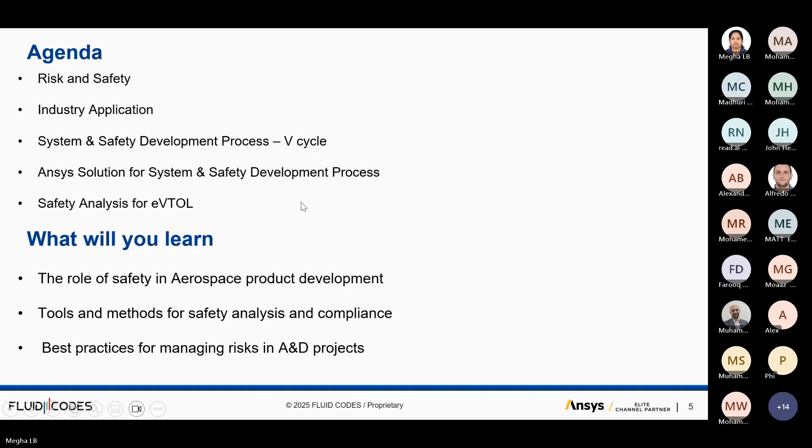Let's first understand the conceptualization and requirement definition. So in the requirements, it's nothing but the vehicle, what functionalities it's going to perform, especially with the requirements, what you are building the component for, what's its end use. The requirement detailed analysis is focused in the requirements, followed by we have design and prototyping.

So in the design and prototyping, for the functionalities and requirements that you have defined, you will be designing a system, subsystems, and components. If it's the OEM, it will be defining a system, what it is going to perform, followed by its subsystems, what subsystems it will be having. For example, it can be hydraulic, mechanical, electrical systems.

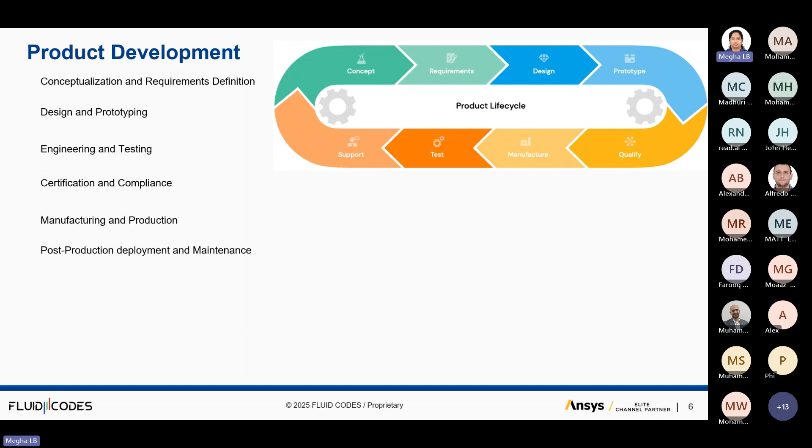Then we go for manufacturing and production, followed by post-production deployment and maintenance. So this is the process.

Let's now focus on the industry specific challenges that aerospace and defense companies are facing at the moment. Initially there's the high cost, because it is a research and development investment, followed by long development cycles.

So why does this happen initially? Because either there are no clearly defined requirements, or no clearly defined functionalities, or at the design stage the design or architecture provided is not very detailed. This is also why development cycles are long, because it's always done in a series manner: you have the requirements, then functionalities, then design, then you go for prototyping.

So is there a solution where you can work in parallel, where a requirement is given to multiple teams and they all work together? This would shortcut your long development cycles into smaller ones.

Next, what is the next challenge the industry is facing right now? Regulatory challenges. That comes into picture when the deployment of your system is going to be in different regions of the world. So to have it qualified with respect to the certifying authorities, you have to go through the certification process. For this, you have to define a process with respect to the industry standards defined by these agencies or companies.

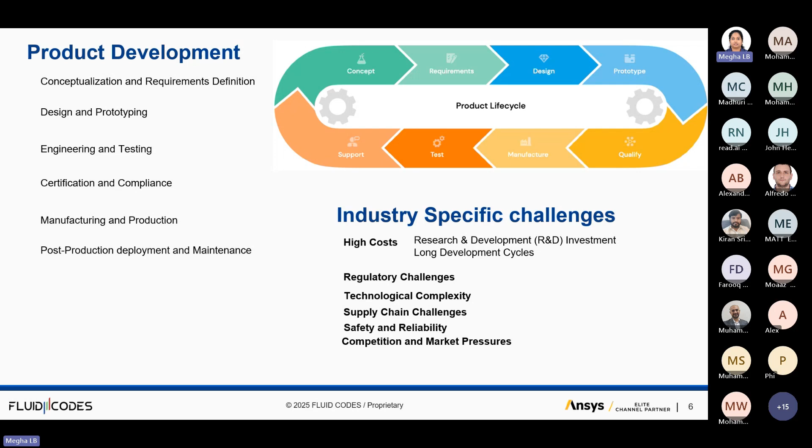This is completely about the initial phases of product development, where we come across the risk and safety of each subsystem that you have defined in your initial stages. So it all starts from risk.

What is risk? It is the likelihood that a hazard has the potential to cause harm. For example, an electrical failure, a hydraulic system failure, or a mechanical or electrical wire failure. All these failures are caused by a hazard. Safety is a condition where the risk of harm and damage is limited to an acceptable level. Following this process, we're not saying you eliminate failures 100%; we always say that failures are present but at an acceptable level.

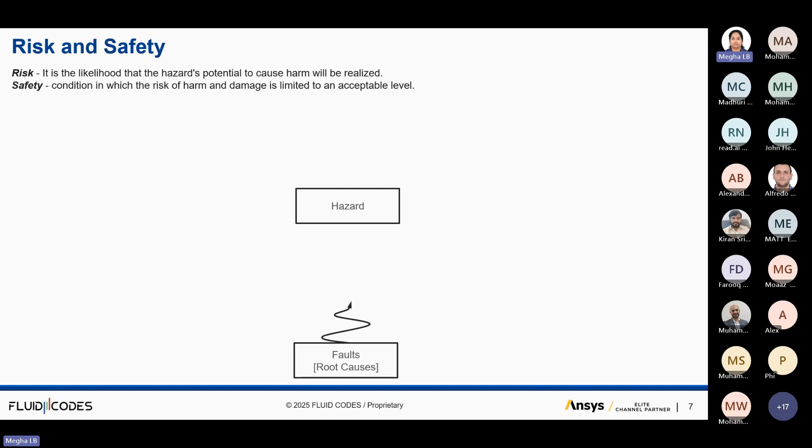To understand that, let's focus on what hazard is in the first place, or why it is caused. Hazard is nothing but a failure resulting from a fault in your systems or a component. It leads to failure of your system, which leads to the hazard of your system. This hazard will cause damage to the function of your system to perform.

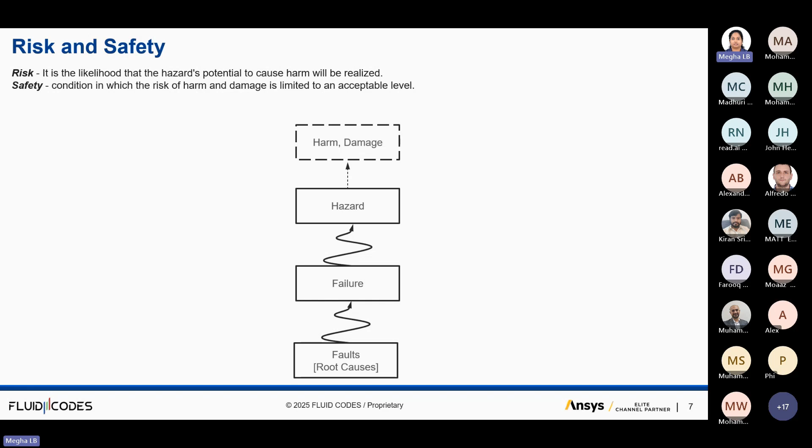There are two types of analysis that we do for this. One is function-oriented, checking if it is performing as per your requirements or functionalities. Or we do a detailed design system analysis where we see the failures in your system with respect to each of the components. Your systems or subsystems here mean the power systems, the sensors, the power distribution units, or the control systems. So you walk through the design and the failures that can occur from the subsystems, or you walk through the functionalities each subsystem is supposed to perform and how they are failing, or how they can fail.

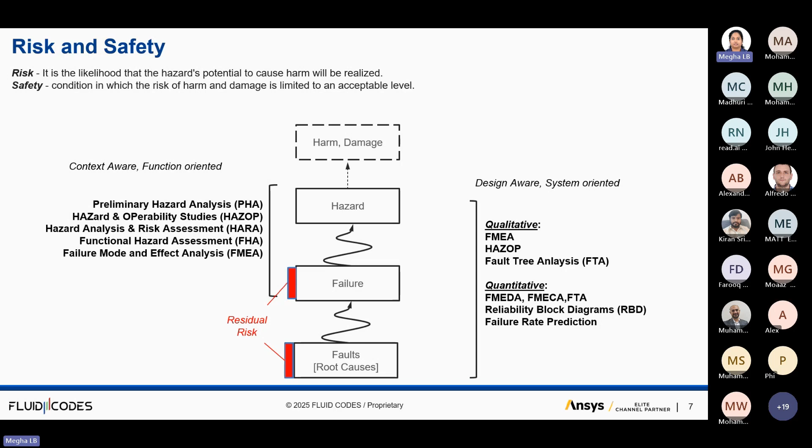All this analysis is done at a conceptual level. Even when done at a conceptual level, there is always, at the end of the day, a fault present. That fault which is not mitigated with respect to all the safety processes, we call a residual risk. It's always there. But how it's mitigated is with respect to control measures.

This is where reliability, availability, maintenance, and serviceability come into the picture, followed by avoidance. We can introduce avoidance measures to make sure our faults are not caused, so there is no hazard and no interruption of functionality. As I said, it's as low as reasonably practical.

When it comes to functional hazards, we have preliminary hazard and operability studies, followed by risk assessments, functional hazard assessments, and failure mode effects analysis. All this analysis is done at two points: one at the system level, your complete vehicle, and second at your subsystem level. All the functionalities defined for each subsystem and each function are put into the operational situations, followed by the analysis.

On the right side, the design analysis is basically two types of analysis for your failures: one is quantitative, one is qualitative. In the quantitative, we say what is the probability of failure of each system. When it comes to qualitative, it's always the modes of failure—how it is going to fail. Is it a communication failure? An electrical failure? A mechanical failure? A fire hazard? That's the type of qualitative analysis.

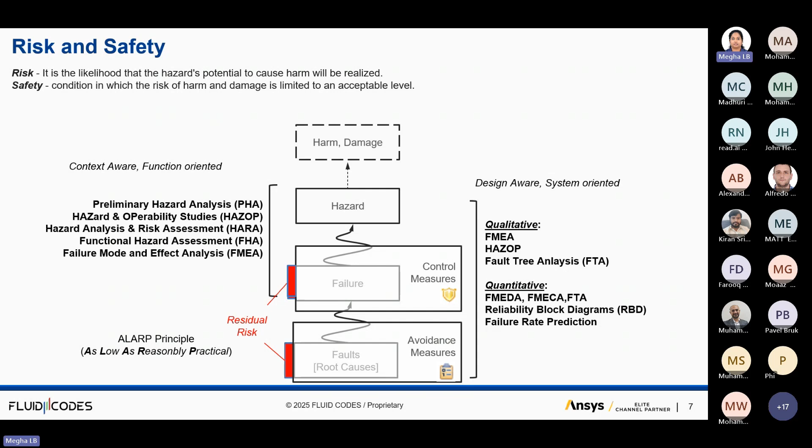Industry application has a set, as it is an aerospace related industry with respect to safety. We have ARP standards. All the processes that we have defined in the last slide are present and defined by industry with respect to the standards or the product that you are building. So if it is with respect to human interactions, or humans have been present in the development of your product, you always have to consider ARP standards.

That is aerospace recommended practice, given by SAE, Society of Automotive Engineers. They have given two standards: ARP 4754 for complete civil aircraft development and systems, followed by ARP 4761, which is for safety assessment. These two standards always go in parallel for the development process.

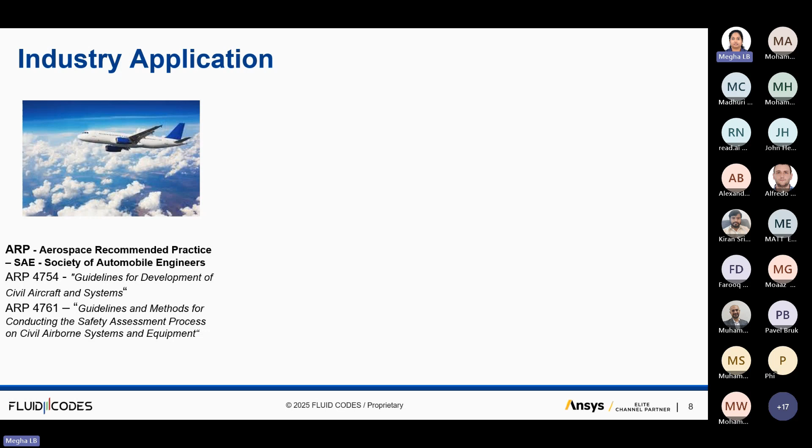Next segment is our satellites. Here we have unmanned satellites and manned satellites. Over this, you can choose if it is with respect to the safety of the astronauts, or with respect to the reliability of the functionality of your satellite. For that, we have Space Product Assurance, which is with respect to safety and quality, defined by the European Cooperation for Space Standardization and also given by the European Space Agency.

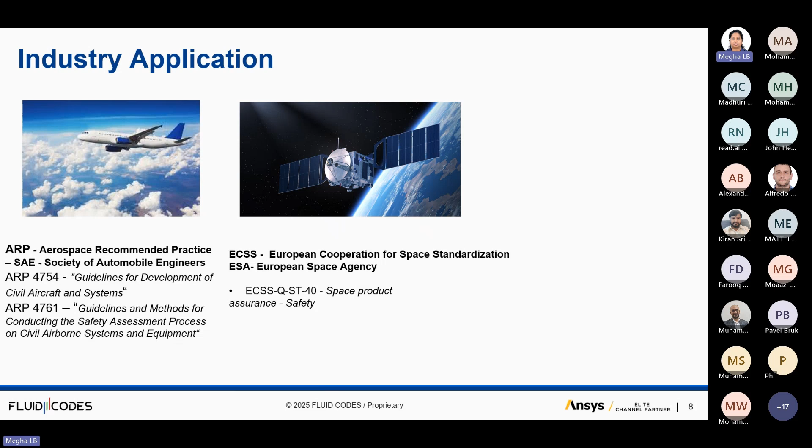When it comes to military standards, if you are developing a UAV with respect to military standards, there is MIL Standard 882, given by the Department of Defense, which is with respect to system safety. When it comes to military, we always concentrate on reliability as well as the failures and the effect of the failure in terms of cost, because there is no human interaction considered with respect to military standards. So this is the difference in how you can use the above hazard analysis with respect to different applications within the aerospace and defense industry.

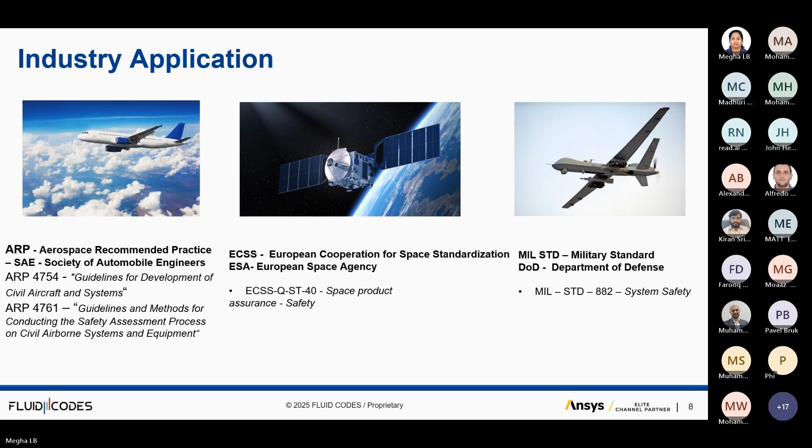So for today, we'll be taking up the ARP standards, as we were discussing, what is the process and how we have to define the standard processes given by the aerospace industry.

So there will be what we call the V cycle, where we place all our analysis at each level. For example, at the concept level, we have hazard analysis at the vehicle level, which is a very high-end level. Then we have preliminary design and detailed design for your systems and subsystems, and you allocate all the hazard analysis to your systems and subsystems, followed by implementation at the hardware and software level.

Then we have system verification and integration. Here, once you have developed your systems, you integrate them back to your aircraft or air vehicle, and then you test the systems. This complete V cycle is the industry standard as of now, and is the one followed.

So here you can see it's given in a V shape, which is not a series, it's a parallel activity. As we were discussing initially, it's a long development cycle, so this is one of the solutions from the industry standard that we currently have with respect to this product development. This V cycle represents parallel activities that can take place at each level; it's not a series activity.

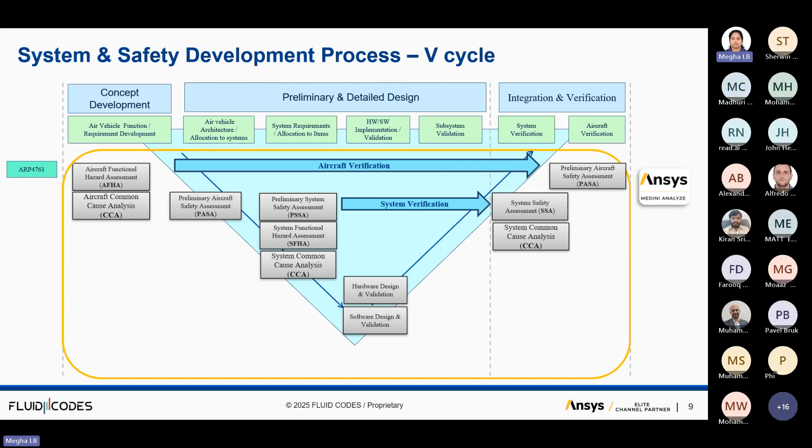So let's now discuss how ANSYS will support you guys with this industry standard as well as with the safety processes that is present.

We have a solution in ANSYS where, in a single platform, you have the requirements, and then you import the requirements, define the functionalities, predict the hazards you can see, define a safety requirement for that hazard, continued by your complete system and subsystem architecture, and also the failure prediction for the architecture or hazard analysis of your subsystems, followed by FMECA, which is with respect to the failure modes, how your systems are failing, not only how quickly they are failing but also by which mode, where you can introduce safety mechanisms to reduce the probability of failure. Followed by reliability, which with respect to hardware and tier 1 or tier 2 suppliers lets you predict reliability and make sure quality meets requirements.

And then you also have your safety case compliance with respect to certification processes. At the end of it, you always have a report that you can directly submit to a certification authority, showing that compliance has been done with the help of a qualified tool, which is present with the ANSYS solution, following all the process defined by the industry as well as the standard. So covering these three aspects is the solution ANSYS gives you with respect to the safety and reliability of the development of a system.

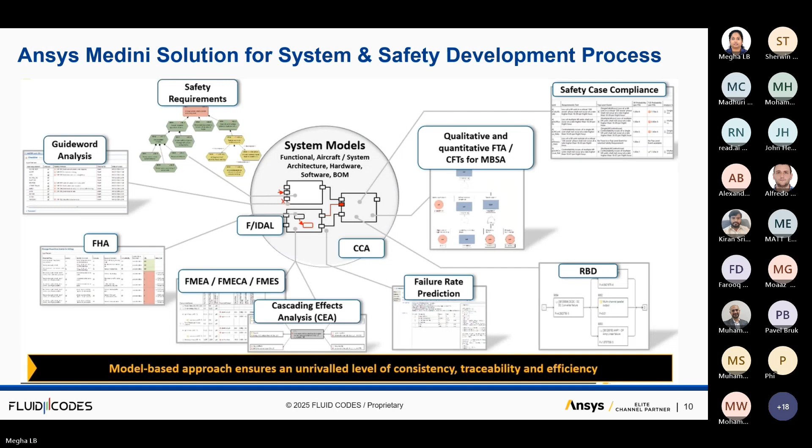So that's about the safety process. Let's take you through one example of how it works.

Today we will take you through the Medini application with respect to an electrical vertical takeoff and landing taxi. Here we will take you through the system functions, followed by the model—how we model our vehicle with respect to the functions that have been defined—followed by the guide word analysis for each function to predict failures, and then the functional hazard analysis, and the design assurance level for each function when there is a malfunction present.

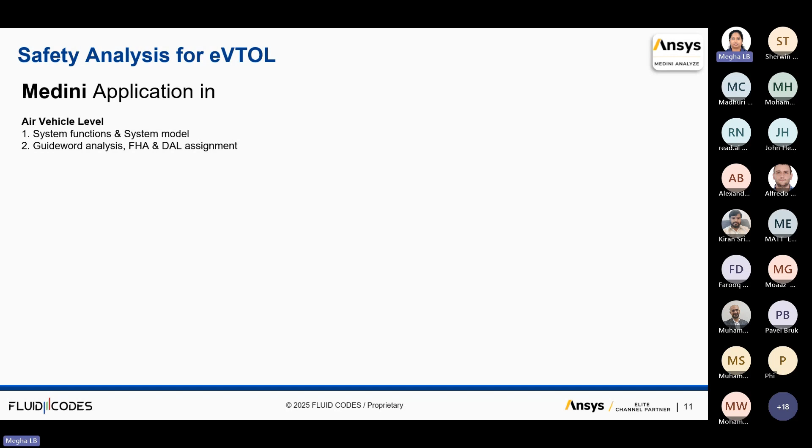Next, we will take you through the functional traditional fault tree analysis, FTA, which is qualitative as well as quantitative analysis at the system level, where we find the root cause for each malfunction we are predicting.

Then we have FTA evaluation followed by system requirement generation for each of the failures. When we go to the component level, we have failure mode effects and criticality analysis, followed by reliability prediction, specifically the failure rates for each component.

Followed by the common cause analysis, because in the system we have different systems, and we need to see how failure of each system is going to affect other systems in our vehicle, followed by safety case compliance, where we see the complete safety analysis process—is it done as per industry standard, is it okay to go with, and can we produce the documents for the certification authority, the OEM, or the tier one? This safety compliance gives you a complete box of information on how your safety process has taken place in your organization.

So all this can be generated automatically with respect to the ANSYS solution. At each stage of the air vehicle—system, subsystem, and component level—all these documents can be exported, and the tool is qualified as well.

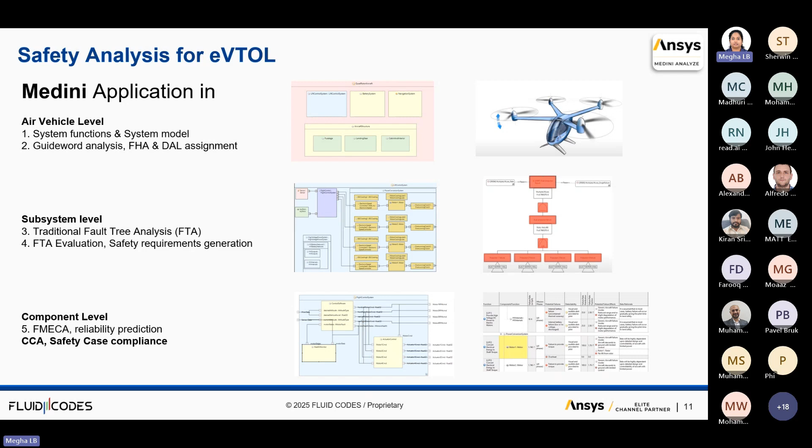Let's go with air vehicle analysis. In the analysis, first we define systems and subsystems, followed by functions. Here you can see in our example we have a quad rotor aircraft, with four rotors. We have the lift system, battery system, followed by navigation, and aircraft structure. We have fuselage as well as landing gear, cabin, and interior. So as you can see, this is our system, which also consists of other subsystems.

If you look at the system functions here, let's take the lift control system. The functionality we are defining here is to lift the vehicle, move it to a certain place, and then land it there.

So let's take this one of the functions that the air vehicle has to perform. The lift system is responsible for that. So let's take one of its functions: provide vertical lift control. To perform that, it also requires the help of other subsystems. It's interacting with other subsystems. How is it interacting? It requires power, it requires position, it requires torque. So these are the subsystems which are present, defined in the form of a net where all the dependencies are given for your system to function.

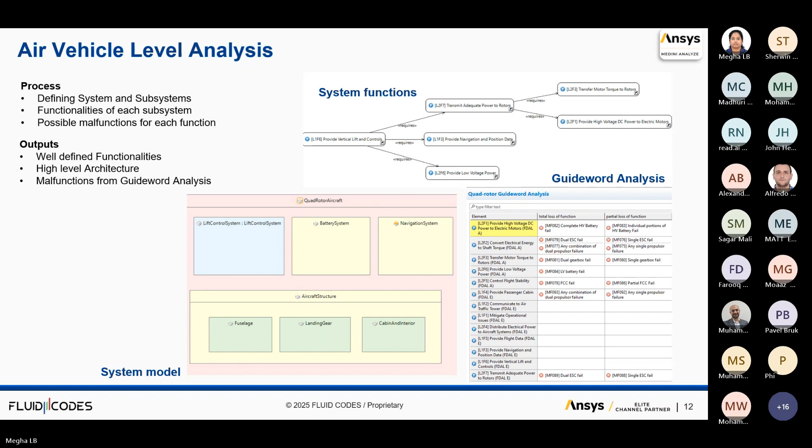So once we have the guide word analysis, we go to hazard analysis and design assurance level. How are we going to do this? How is it defined from the standard? In the ARP 4761 standard, it is given in this table.

Here, based on the hazard or the failure of your subsystem, you will be rating that hazard. Either it can be a catastrophic hazard, or it can be hazardous, it can be major, or there is no safety effect at all. Not only that, if the failure happens, how long can your vehicle sustain will also be considered here.

So we have the function, we have the condition, how the failure can occur, followed by the phase. Phase is nothing but the operational situation that we were focusing on in the earlier stage. The operational situations, as I said, for this vehicle are to take off, cruise, and then land. So this is your phase of operations. You make sure all your systems and subsystems are working efficiently at each level of phases.

That's how the hazard analysis takes place with respect to a situational hazard, situational operations, followed by the effect of the malfunction if it occurs in your system. So based on that classification and also the effect—either it can be an effect on the aircraft, if we are having an unmanned aircraft, then what is the effect on the functionality of the aircraft? If there is a human interaction with respect to the aircraft, then with respect to how the hazard is caused to the crew who are present in the vehicle.

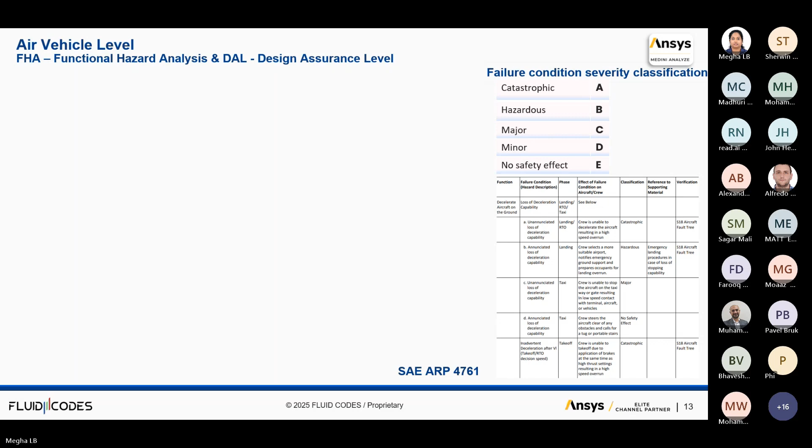Let's see how in the ANSYS solution we have defined this. This is the standard. On the right side, you can see what is the standard. When performing this analysis, there are multiple factors we need to consider for each functionality, dealing with respect to either cost or human lives. So it's a critical analysis that we are doing.

We have the functionalities, followed by the malfunctioning behavior derived from the guide word analysis. Then we have the phase of operation - where the malfunction is taking place and at which level of operation. Then we have the failure conditions - if this malfunction happens at this phase, what is the failure condition?

Followed by the crew awareness - are we able to alert the crew or not, and what's the effect of failure on the aircraft? Followed by the occupants - what is the effect on the occupants as well? Then we have failure condition classifications with respect to the standard.

Then we come to the FDAL, which is nothing but your design assurance level. For each function, you define the design assurance level with respect to your hazard. This will give you the components of how your system has to be developed, and it will give you the safety requirements at the end when you do a hazard analysis.

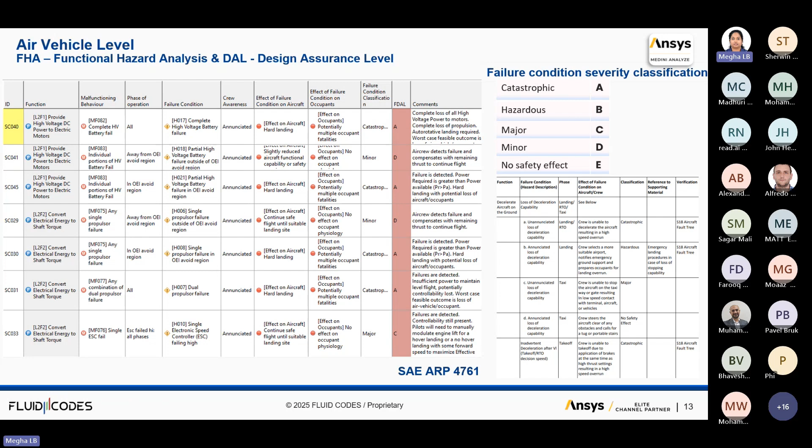So all the FDALs here will be automatically generated from the ANSYS solution for you when you define these functionalities. You don't have to refer back to the standard each time to define this. The comments here will also give you what safety requirements have to be taken care of.

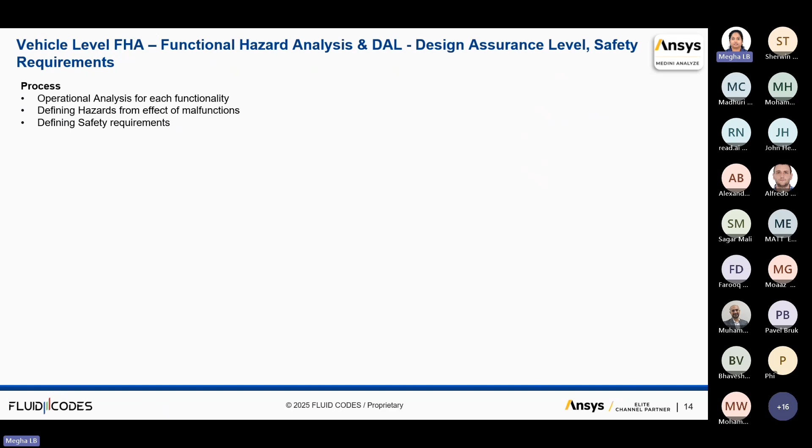Next comes the safety requirements. In the safety requirements, operational analysis for each functionality will be given, followed by the malfunction and defining safety requirements. Initially, in the last slide, we saw we defined the assurance level for each function. For each function defined, we derive the safety requirements - for example, the dual failure is not supposed to happen, which is one of the safety requirements.

Once you define the safety requirements, you can automatically tag it to the analysis that is required based on your FDAL. So if your FDAL is A, then you have to perform a certain kind of analysis to see what your failure rates or root causes for that failure are. What kind of analysis you need to do is defined from the standard already placed in the ANSYS solution.

So the output of this is basically the FDAL for each system - you know how critical your system is and how it's supposed to perform, followed by your safety requirements for each system and how you have to develop, test, and then integrate it. This takes place at all levels of the development process - all test cases and safety requirements will be met at each level of product development.

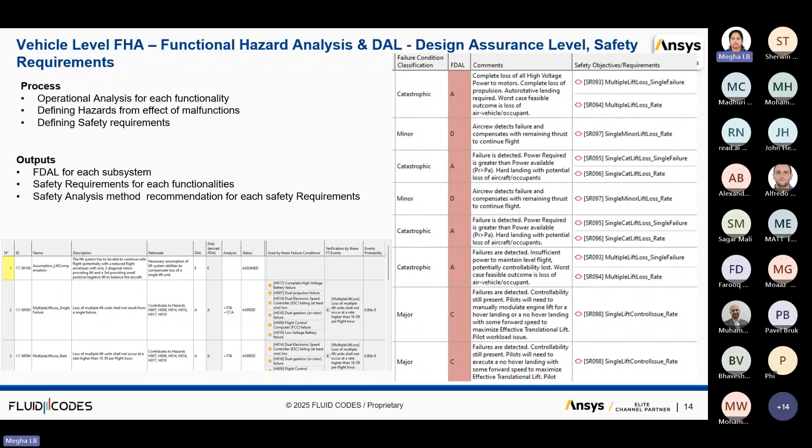So this is also defined over here. Now we have the functions and malfunctions. Let's define our architecture of the system. With respect to functions, this is how the architecture of the system has been defined. Here you can see all the higher level systems represented, as well as the interactions between them.

How they are interacting with their subsystems as well. Over here you can see the complete architecture of the system, which can be an output for your tier 1 or tier 2 suppliers, or an input for tier 1 tier 2 suppliers from their OEMs. This is basically done at any level, for the system level activities. So whoever is working on it at the system level can define a complete detailed architecture with respect to the systems.

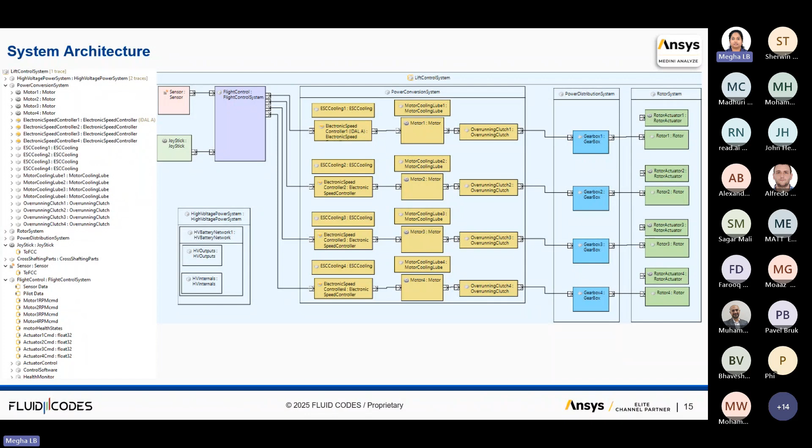With different stakeholders. When we have this architecture, we need to know how our components are going to fail, how all our subsystems are going to fail. How can we predict that? We have safety analysis.

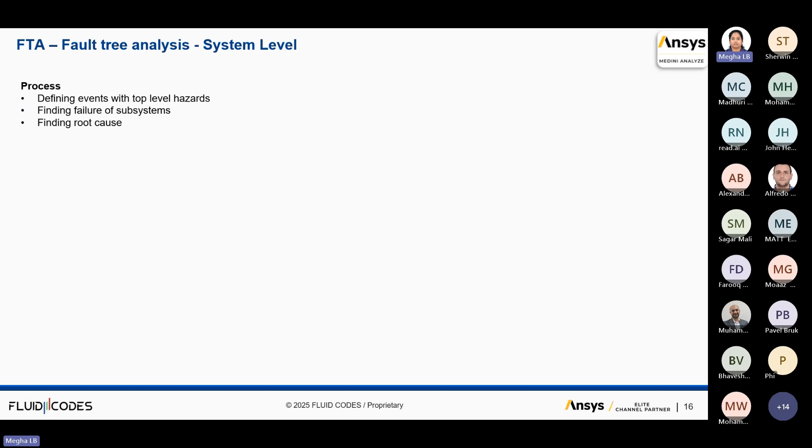One is fault tree analysis. At the fault tree analysis or system level, we define top level hazards, and then we find the failures in the subsystem and why the subsystem is failing and what is the root cause of it. Here you can see how the safety requirement is being traced back to the hazard, followed by the failure, and then also followed by a system failure, a subsystem failure, followed by your component failure. On the left side, you can see the probability of the failure as well.

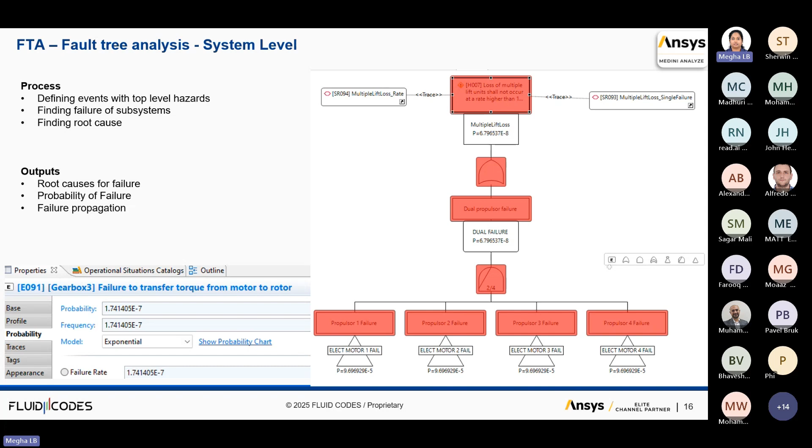So here also I would like to mention that this probability analysis as well, we have templates which are well defined. So at the end of the fault analysis, you always come up with a root cause for the failure of each system and the probability of failure, and then failure propagation. The ANSYS tool will give you propagation failure from your top level to your component level.

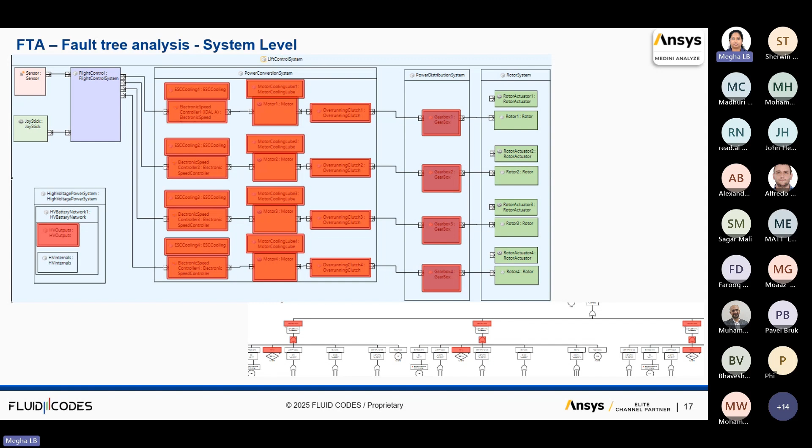As I was saying, the propagation of failure, here you can see in your architecture as well, where it is easily predictable how your system is going to fail and what subsystems are caused due to that.

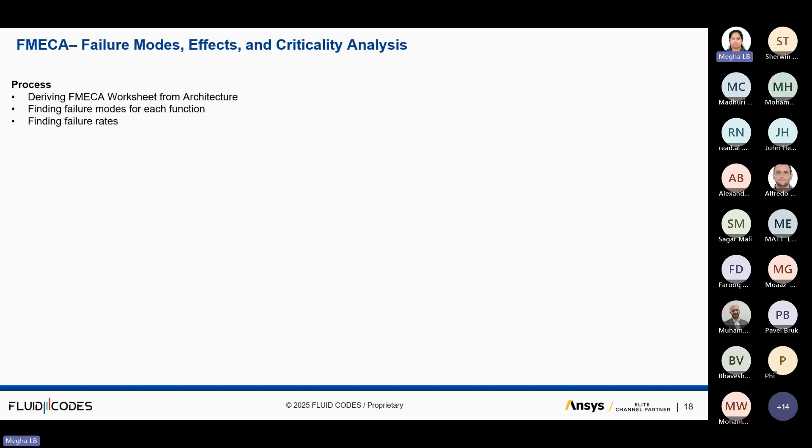Next, we have failure mode effect analysis. Now we know the failure rate and at what point it is going to fail. Now we need to know how it is going to fail. So we can directly derive a failure FMECA worksheet from our architecture with the ANSYS solution, where you can find the failure mode for each function as well as failure rates, which is shown here.

So you see the type of analysis we are doing over here. It will give a complete level of analysis for your entire system - your component, your system, your subsystem. So it will help you choose better components or design a better architecture for your subsystems, or work on your requirements to meet this. So you can always go back to your requirements to ensure the safety requirements are met.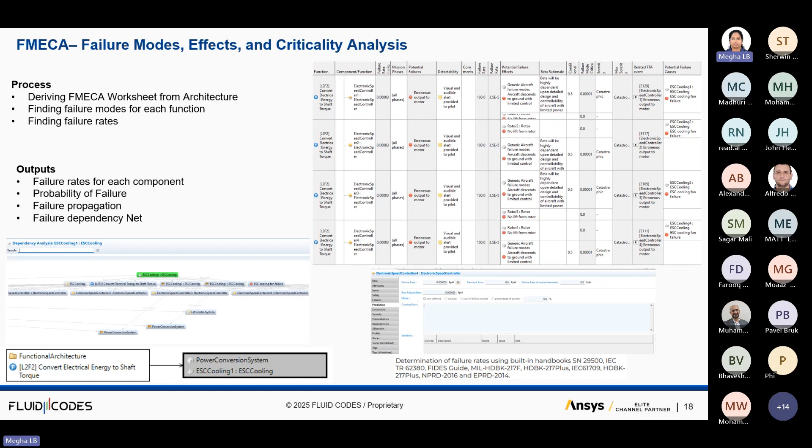This also can be given as a document that you can give to your software and hardware teams in the working environment, which acts as an HSI document for them.

When we are talking about the analysis, there is also common cause analysis, which is basically apart from electrical system, power distributions - we also have mechanical systems, hydraulic systems, and electrical. For example, if there is a failure in the electrical system, multiple systems will fail in our vehicle. So this is part of common cause analysis. Due to one failure, due to one risk, there are multiple failures which cause multiple hazards at once. So we call this common cause analysis.

This evaluation table, which is already predefined in the ANSYS solution, will give you how you have to make sure all these common cause analyses are not present, which are not dependent on each other, and then also identify it and see the effects of it.

Here you can introduce a redundancy. That's how, when there is a common cause analysis, we are identifying it and reducing it. You are reducing the interdependability of your subsystems on each other. You introduce a safety mechanism, so even though there is a failure, at last your functionality is still there - maybe not 100% functioning, but maybe at 80% or 70%. If we are able to achieve this for each of the systems, components, or functionalities, that's going to make a lot of difference with respect to the quality and reliability of the system.

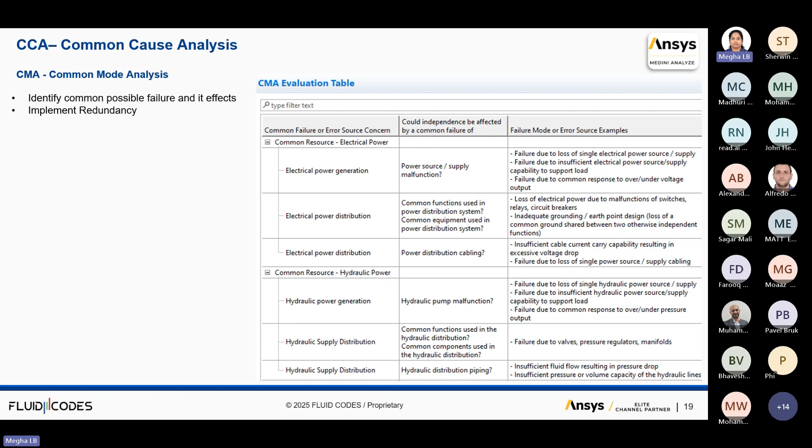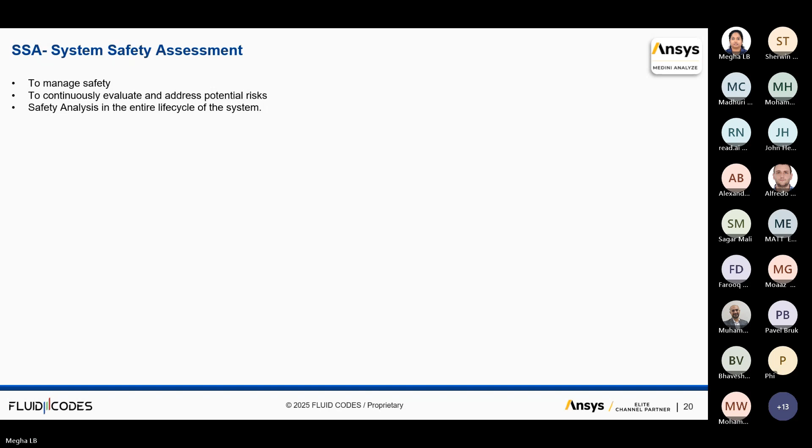At the end of it, we have done all these safety processes. So once we go for the certification process, we have to make sure all this is part of the documents. This is where it comes into picture - Medini will tell you whether you have completely evaluated all your safety processes as defined by the standard or not.

Here you can see for each safety requirement, you need to fulfill it with respect to your probabilities. Only if you have completed all the steps and all the recommended practices for safety, then it will give you a green, which means this safety requirement is completely satisfied. If not, you have to go back and rework on that.

So why is this important? It will make sure that no safety process has been left out, or that you haven't made a mistake at any point of the development process, and also to make sure the quality is met as per your requirements, and that there is traceability between the functionalities - followed by, especially the most important one, your DAL, the design assurance level for each subsystem. So all this is met and your complete product has been developed with respect to industry standards as well as with a qualified tool. This gives you continuous evaluation of your complete process or development phase, which is a detailed development phase.

It will also help you with the complete safety analysis lifecycle. So as you can see, in a single platform, you are able to see all the things from the initial requirement till the end of deployment as well.

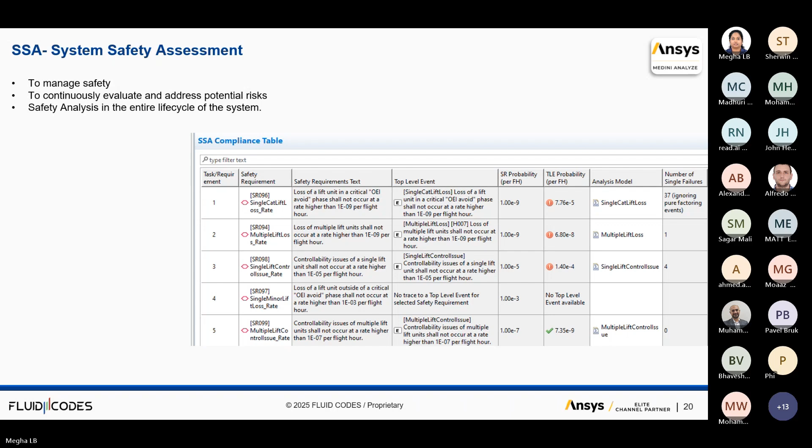So in conclusion, what does Ansys Solutions give to your existing work process? A complete concept modeling before you go into the manufacturing process, which will help you achieve real-time deliverables, followed by your MBSA, because MBSA is the state of the art as of now in the industry. It's all model based, as you can see, and all stakeholders can participate.

There is no mentioning of complete technicalities in depth, it's always about the functionalities that you do. Because it is an MBSE based process, it is always tailored with industry standard and is a defined standard process. Then we have reliability and prediction analysis, which is also a scalable analysis, either from your component level to system, subsystem, or complete vehicle level.

We have traceability and validation, which is especially with respect to the quality of your product. We have teamwork and review support, as you see, with an SSA at the last, so it will give you teamwork on how the process is going on. We also have other tools which you can integrate with Ansys, such as Medini, and requirement tools which can also be integrated, like Doors, with respect to Medini.

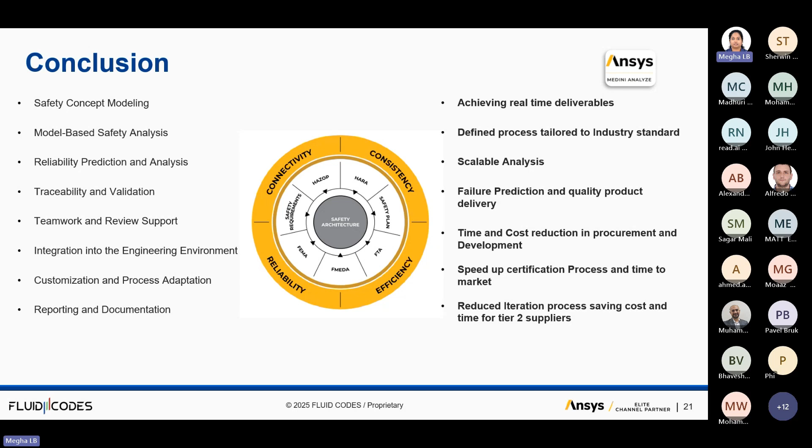So when you use a qualified tool which already has a well-defined process, all these steps can be reduced. This helps you reduce that long development cycle and detailed designs, and then move forward with your manufacturing. This will speed up your complete concept and detailed design phase. That's how Ansys solutions help you at the system level.